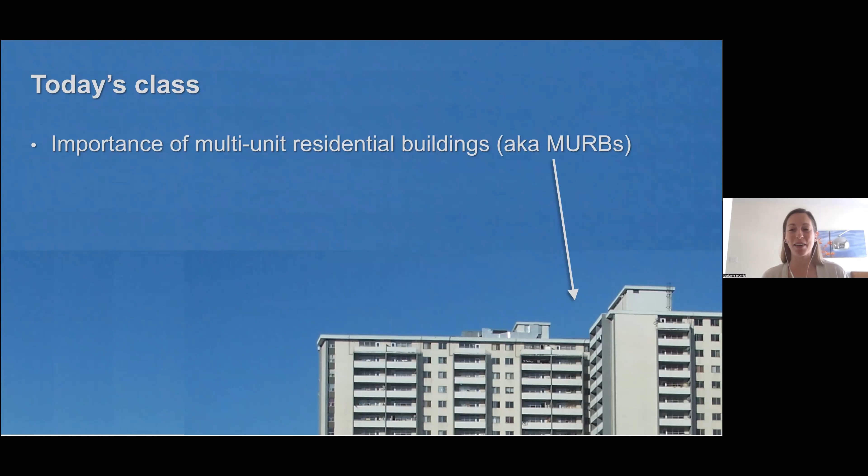So today I'm going to talk to you a little bit about my research and my area of interest in high-rise housing. This is something I've spent the last decade or more researching, and I'd love to share some thoughts with you today. So in our class today, we're going to start off by talking about the importance of multi-unit residential buildings, or MURBs, as we often call them in our group. Then we'll get into some of the common performance issues we see in MURBs, and introduce some of the challenges we'll see as our climate begins to change. Finally, we'll discuss some mitigation and adaptation opportunities in this building stock.

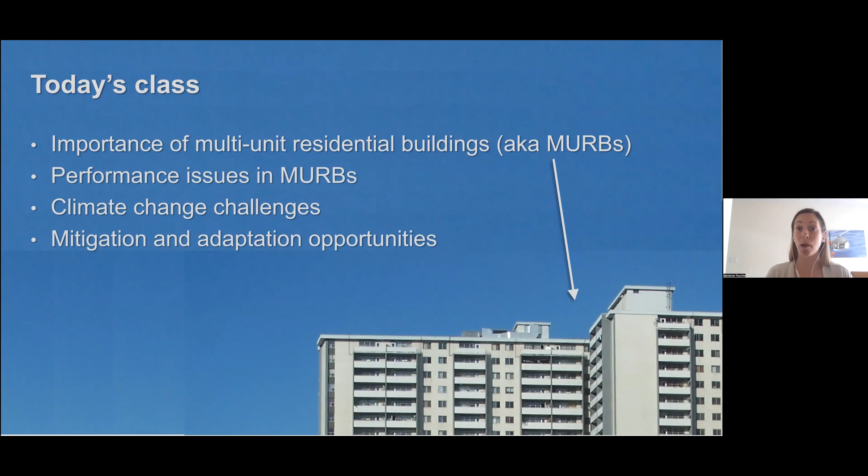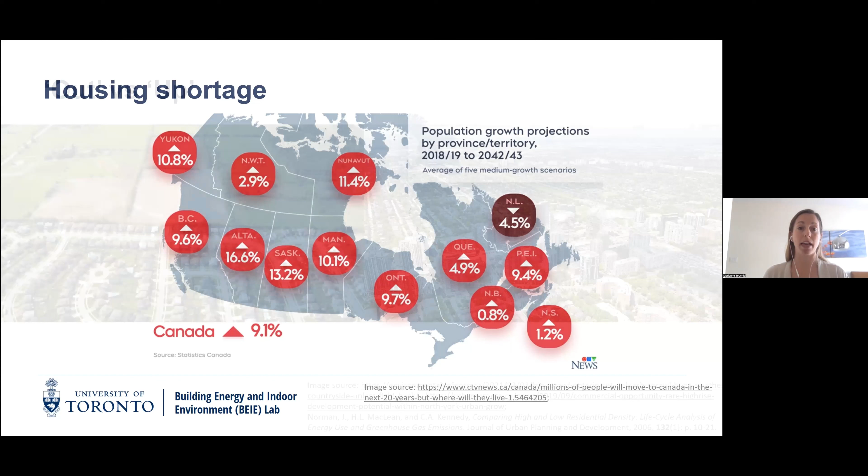Anyone who lives in the Toronto area is probably well aware of the news cycle talking about the housing crisis we're currently facing, even across the country more broadly. This pressure on our housing stock is only going to grow with our increasing population. We have a choice on how we meet this growing demand: the age-old question, do we go out into the suburbs, or do we go up and intensify our housing stock?

This decision, while the basis of this presentation is really going to focus on building level performance, I wanted to introduce the idea that how we pursue meeting our housing needs in the future goes well beyond the building level and has implications across the broader building stock. It's important to recognize that if these buildings are appropriately designed and operated, and I use that caveat which I'll explain more later,

MURBs can really be an inherently more sustainable form of housing, simply due to their material and space efficiency and the fact that they have less exposed surface area per dwelling unit. They also support more active and public transportation and keep the costs of urban infrastructure at a per capita level lower than what we'd see with a more sprawling development like you see here on the left. In the middle, I've got a snapshot from a paper written by some colleagues of mine a number of years ago, but I find this quite striking when you look at the GHG emission impact per person, not just associated with building operation, but that broader impact of materials, which we'll touch on, and the transportation implications of this building type.

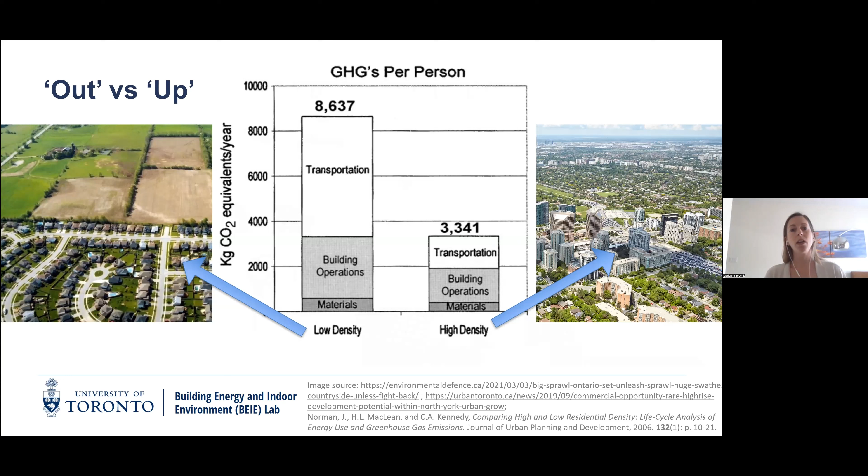So I just want to keep that in the back of our mind. In meeting the needs of our growing housing need, the big question is really whether MURBs are going to be the solution for us.

I have these two images up on the screen because they're predominantly two archetypes we tend to see in Canada. The post-war set on the left is from the 1960s, 70s, and we're currently in the middle of a second housing boom, which seems to have no end in sight. So we're going to address these buildings separately. While they do have a lot of shared features, they also have some unique features, so we'll talk about those.

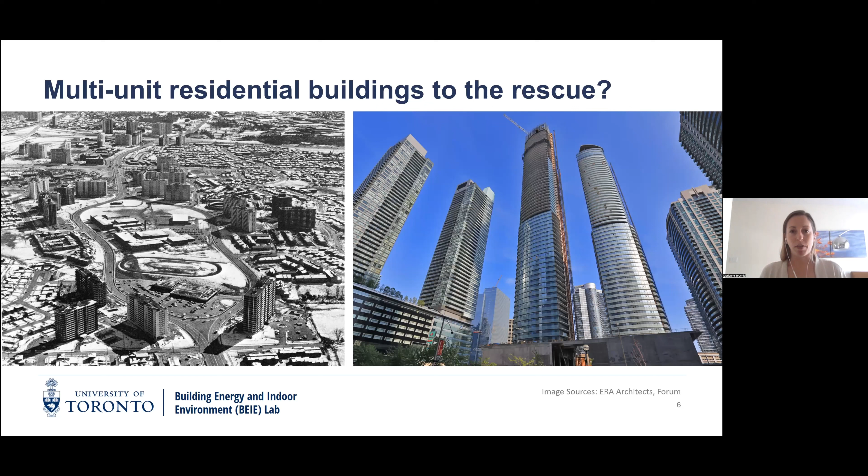But I think the big challenge we face, and that we need to keep in the back of our mind through this whole discussion, is that the vast majority of people still prefer detached homes. We'll go into some of the reasons for this. But in order to really drive this more dense housing, which we know has huge impacts in terms of our GHG emissions, both with respect to building operation, embodied emissions, and transportation related emissions,

we need to make this source of housing more attractive. So really the goal of my whole research program is to not only reduce energy use, but at the same time to really improve the quality of the indoor environment for residents so that this becomes a more attractive place to move to, this type of building form.

So let's start by looking at a couple of common challenges we see across this building sector, and then we'll layer in some of the climate change related challenges. Despite what I just mentioned about these buildings having the potential to be more material and space efficient, we tend to see incredibly high energy use intensities in these buildings, sometimes higher than single family building types. This is a concern which we'll address, and I'll explain some of the root causes.

In addition to that significant energy impact, we also see a lot of discomfort issues, which obviously make this potentially not an attractive source of housing - thermal discomfort, olfactory discomfort, acoustic discomfort. We also need to consider some of the challenges related to high-rise living in the event of a power outage - lack of mobility, elevators not working, water distribution, things like that. We'll talk about those as well.

If we look at some of the specific features of post-war buildings and our newer contemporary buildings, post-war buildings tend not to have central cooling, which is going to become a critical issue as we start to see our climate changing and growing warmer.

We're already at this point in time seeing dangerous summertime overheating, so that's something that we need to address. And then on the contemporary building side, where we've got these highly glazed buildings, we tend to see visual comfort issues, lack of visual privacy and glare, also thermal comfort issues related to those highly glazed enclosures. So certainly something that we need to consider.

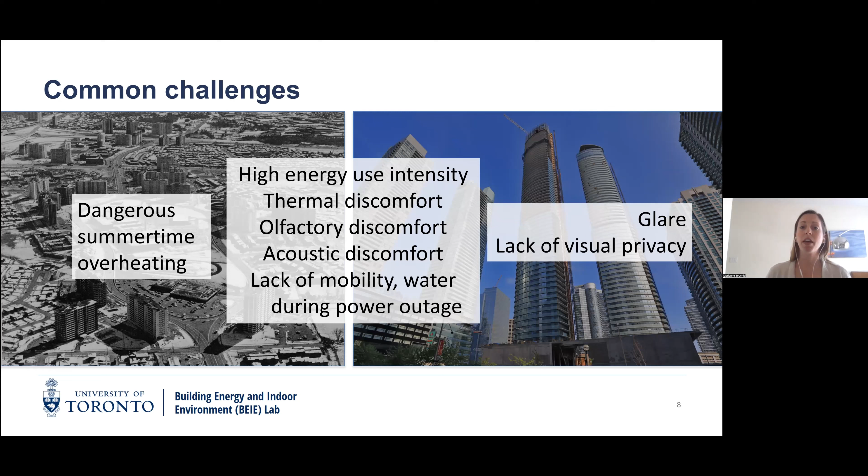So what I want to do is delve a little bit deeper into these two archetypes. We've done some extensive field evaluations of occupied buildings. While we do some work in the lab in my group, really the city is my living lab. So a lot of the work that we do is in occupied buildings, which makes our research I think really exciting, also somewhat challenging sometimes. So I want to share with you 2 or 3 studies that we've done, 2 field studies and 1 survey-based study, just to paint a picture of what's going on in these buildings.

So one was a study that we undertook. I actually started this when I was wearing a different hat working for the Atmospheric Fund, and was thankfully able to rejoin the study, where we looked at 7 post-war apartment buildings. And we used a combination of resident surveys so we could understand building occupant perceptions and behaviors, as well as monitoring of what are the temperatures that we're seeing in the suites, as an example.

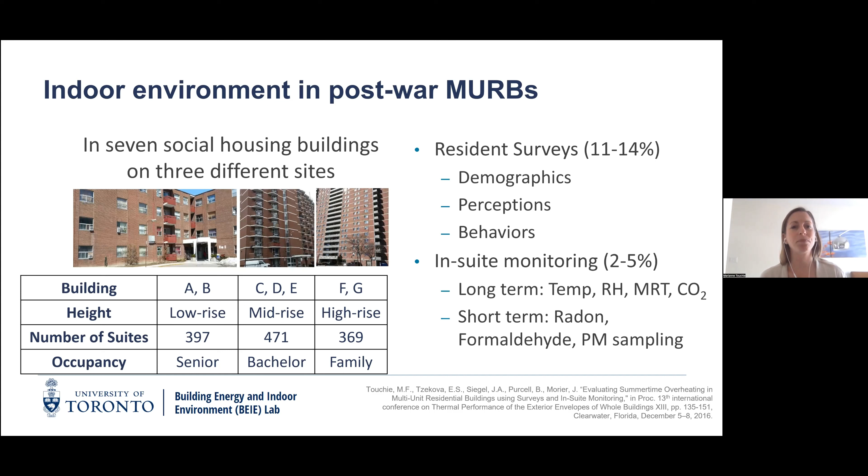So first, if we look at what the residents told us, there's a lot going on here, but I want to separate on the... oh sorry, let me just turn on my little pointer here. Bear with me one moment.

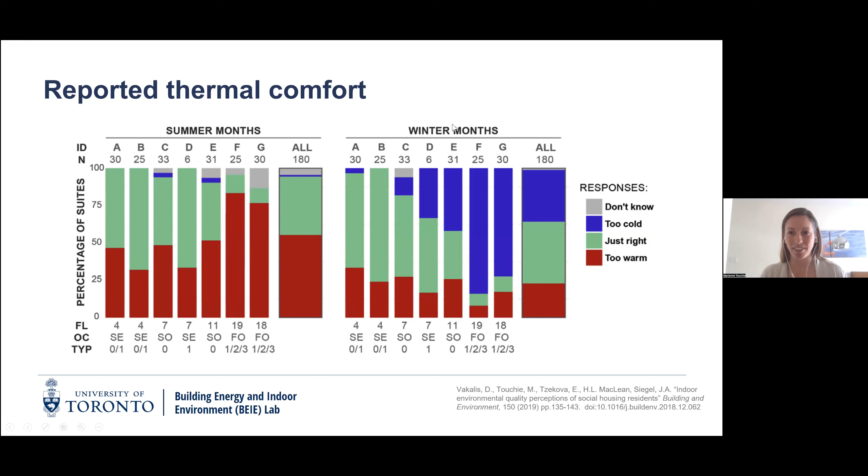This is data from 7 years ago, so we're already seeing warmer summers, which are only going to get more severe as we move forward.

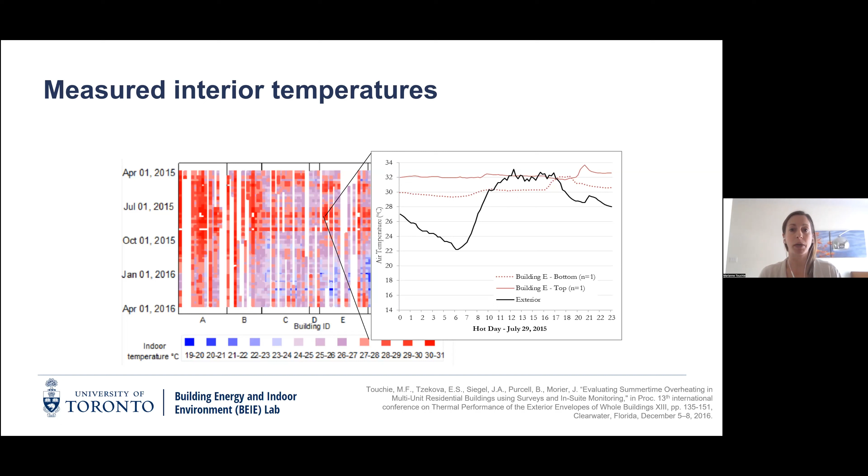Shifting gears a little bit to olfactory discomfort: one of the other questions we asked the residents was about odors that they detect in their suite. And again, we can see that the majority of residents are experiencing olfactory discomfort at least every day. What this is sort of a proxy for is that we have a lot of uncontrolled air movement, so air is not going where it's supposed to, and we're going to come back to that because that's a really key part of the puzzle when we're talking about MURB building performance.

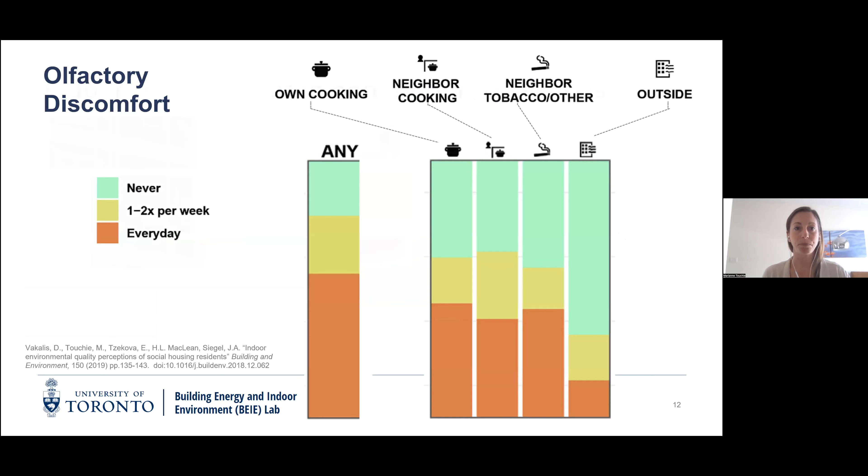So to shift gears from post-war to contemporary MURBs, we conducted a very similar study, again including surveys and in-suite monitoring, to figure out what was going on in these newer buildings as well.

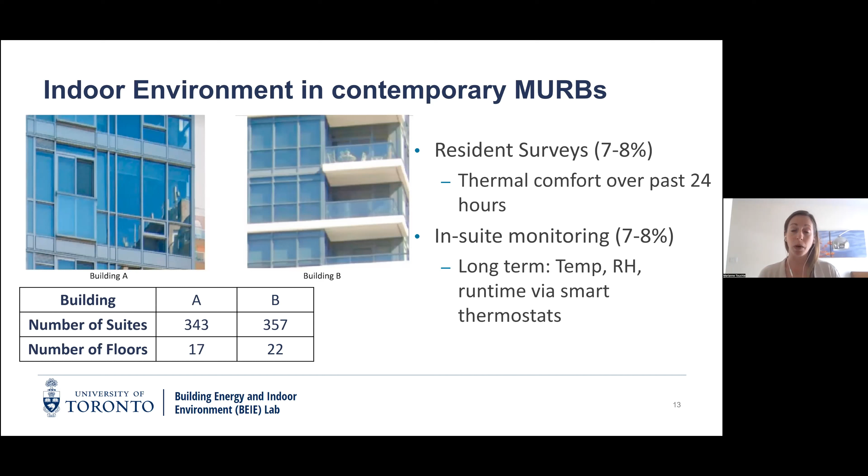So my question for you: are new buildings any better? What do you think? I'm sorry to say, not really.

We found that in reported discomfort, about half of residents were still uncomfortable in winter and summer, even in a scenario where residents have control over their heating and cooling at the suite level. This was concerning. We're also seeing over-conditioning of suites, another clue that air isn't going where it's supposed to, signaling wasted energy. Many residents reported propping open their windows and doors, which again signals things aren't working the way they should.

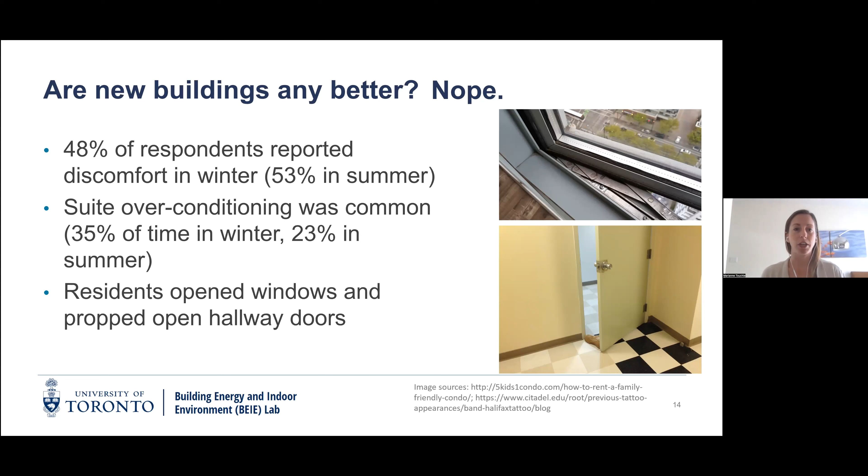In addition to the field studies on post-war and newer buildings, we've also conducted work on understanding acoustic comfort in MURBs. MURBs are unique - unlike a single family home, where unless you're attached in row housing you don't hear your neighbors, in MURBs you're living above, below, and beside other units. So acoustic comfort becomes a big concern in buildings with shared walls and shared spaces.

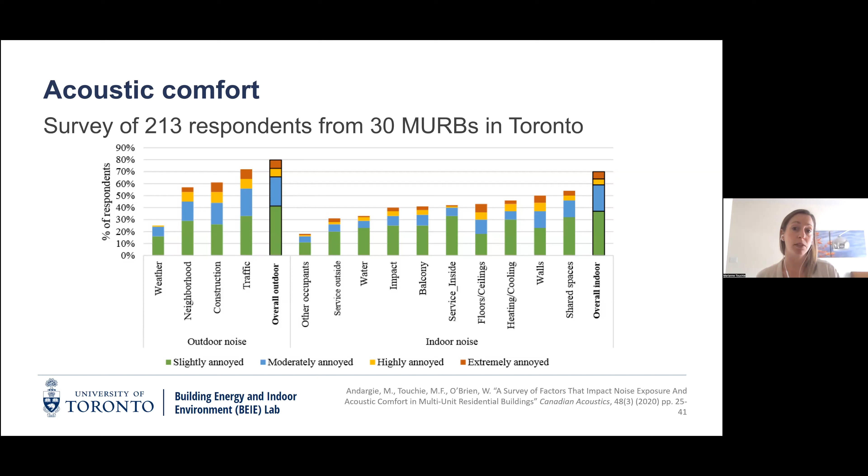We conducted an internet-based survey of over 200 respondents, and we were concerned to see that the vast majority of MURB residents reported acoustic discomfort, related to both outdoor and indoor noise sources. These acoustic discomfort issues have direct impacts on sleep, mental stress, mood, and ability to study and work.

I'll flag that this has become a lot more important - you can see I'm doing this from my home right now. A lot of us are working and spending more time at home, and for people doing that in the MURB context, we have to think about what implications acoustic discomfort has on their ability to work.

As a result of these effects, this annoyance and disturbance, people take things into their own hands and try to improve acoustic comfort in their suites. They undertake interesting activities, one of which is playing music or TV even more loudly than the noise they're hearing to mask it - which only creates even more acoustic discomfort in these shared spaces.

But there are also interdomain implications. One thing people tend to do is weather strip their suite doors. Now in a lot of buildings, that's where your ventilation air is coming from - it's coming from the corridor. So a measure taken to mitigate acoustic discomfort can actually have a negative impact on indoor air quality, by limiting the supply of ventilation air.

This is my first hint at what we need to be doing when thinking about improving the performance of these buildings. We know we need to address energy, and we need to address occupant comfort and satisfaction. But we also need to recognize that all of these systems are interconnected - something you do to address thermal comfort, like window operation, might impact acoustic discomfort, or something to mitigate acoustic discomfort might impact indoor air quality. We need to keep in mind all these systemic interactions.

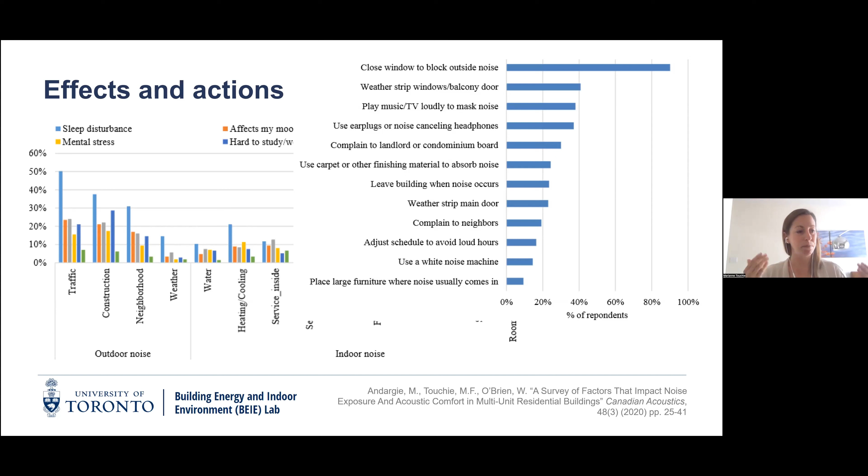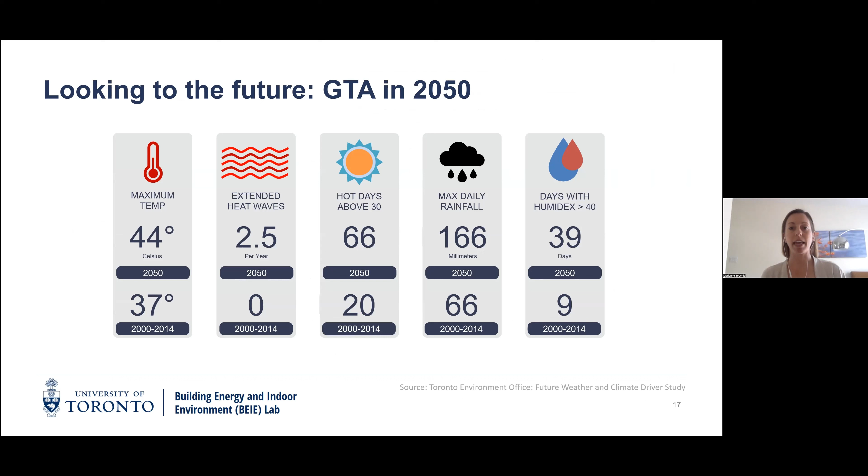So now that I've painted this rosy picture of MURB living - I promise it will get better - let's layer in what's happening in the future. I'm sure everyone on the call is aware of what we're facing as we move forward, and Canada in particular is slated to be exposed to some fairly significant changes in the coming years. This has become all the more real given what happened out west last summer with the heat dome, which is now becoming a serious public health issue we need to consider.

As I mentioned, many post-war buildings don't have any sort of central cooling, and out west it became quite clear that air conditioning is not common in BC. When we see what happened last summer, this is something we need to consider, as well as integrating active cooling.

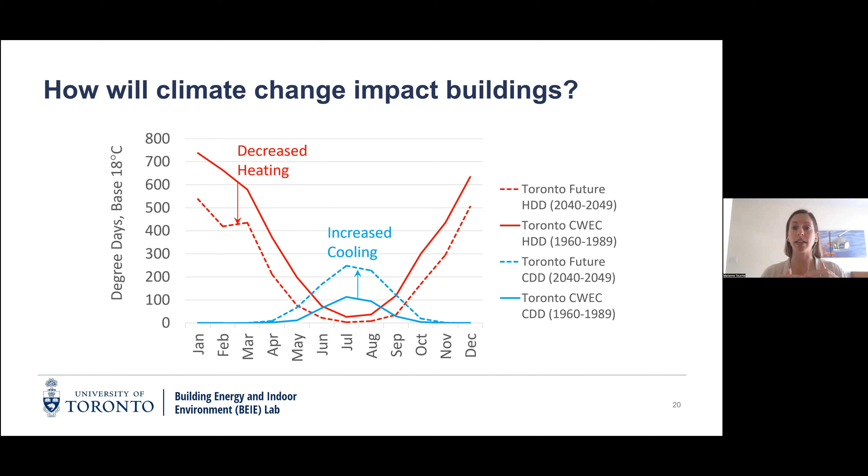As we face a warming climate, we're going to see decreased heating, which will have a positive impact on our natural gas associated GHG emissions, but we're going to see a dramatic increase in cooling requirements as well. So it's important to consider this energy intensity implication.

I've got a model we were playing around with, a multifamily building where we were modeling with CWEC, which refers to the Canadian Weather Year for Energy Calculations. It's a standard weather file that a lot of building designers would use to model building performance. We compared that to a future weather file from the 2040s to understand, if we're designing a building using today's weather, how ill-prepared we'll be for our projected future weather.

You can see there's a huge increase in the space cooling energy intensity, which we need to plan for in terms of our electricity supplies and ability to meet peak loads during extreme heat events.

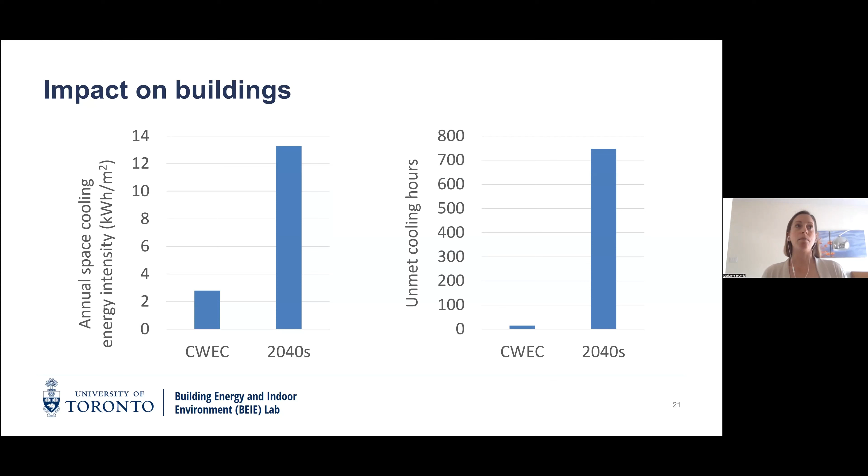We also see on the right-hand side a plot of what we call unmet cooling hours. Normally you would design a system so that there would only be a small fraction of the year when that heating or cooling system could not keep up with the demand. But based on current cooling capacities under these future weather conditions, we'd see a huge increase in unmet cooling hours, which is a huge concern.

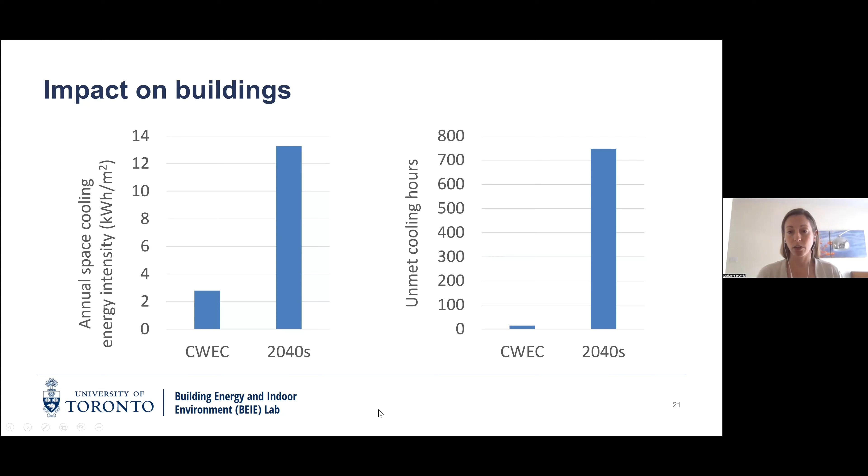We also have other elements to factor in, like increased rainfall events leading to flooding in buildings. While that's certainly an acute problem, we also need to keep in mind the chronic impacts of wet building materials, which if not replaced and repaired properly, can lead to long-term indoor air quality issues.

We're also seeing more and more forest fire events, which again leads to concern. Normally we assume our outdoor air is cleaner than our indoor air, so we can bring that in for ventilation, but what happens when you can't breathe the outdoor air? We need to consider how our buildings are going to continue to operate under conditions like that.

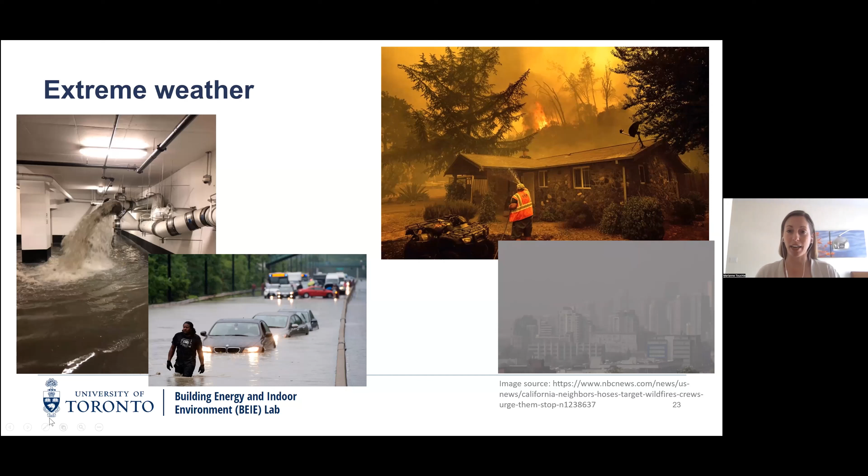As I alluded to before, high-rise living without power can be rather challenging in terms of mobility, access to water, heating and cooling. These power outages are often aligned with extreme heat or cold events, so we need to consider that and the loss of our mechanical ventilation as well.

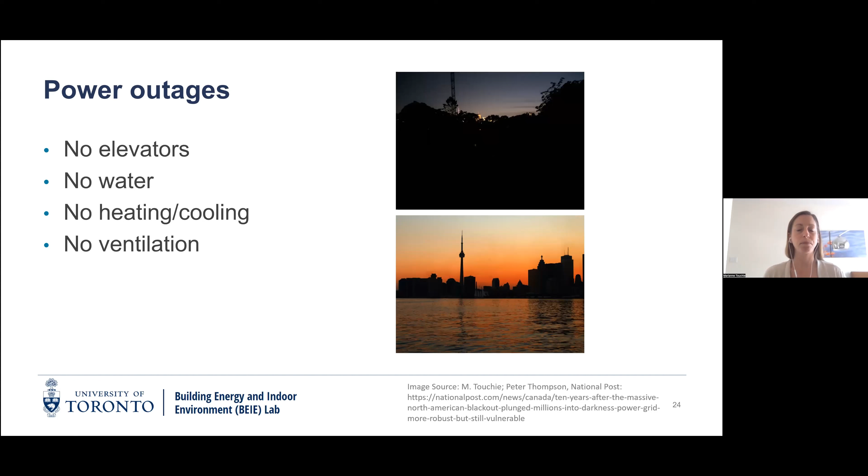Now that we have a clear picture of the challenges MURBs face, and we've layered in what we can expect in the coming decades, let's shift our attention to what we can actually do about it. Many on the call are familiar with these terms, mitigation and adaptation, but I want to point out how they are related in building design and operation before we break these down.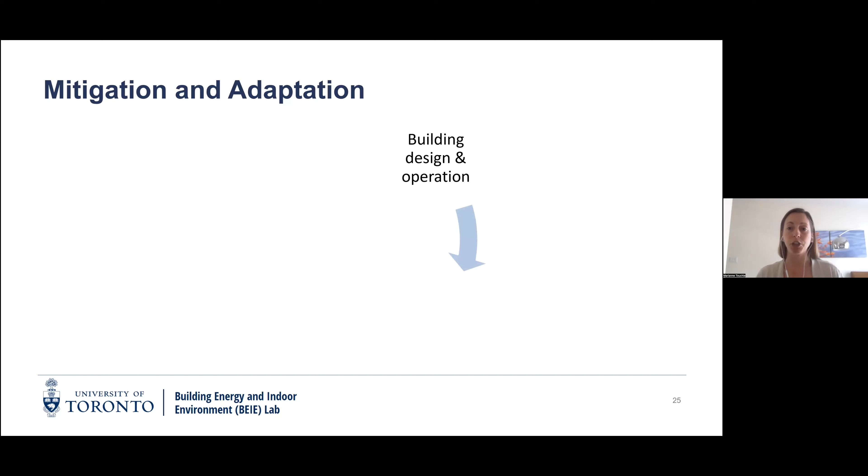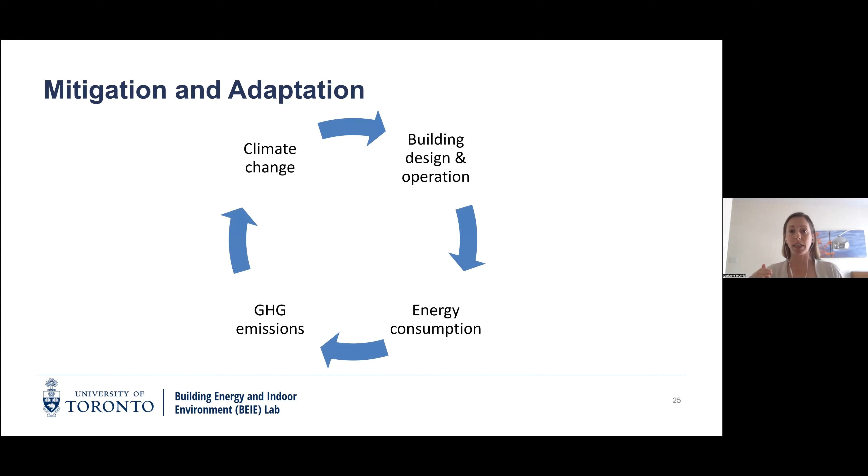Building design and operation has a huge impact on energy consumption, which directly impacts our GHG emissions. Our GHG emissions are what's driving climate change, and climate change then impacts our building design. So in thinking about how we need to retrofit these buildings, we need to consider both mitigation and adaptation lenses: mitigation to reduce GHG emissions, and adaptation, how we change how buildings are operated to ensure a safe, comfortable, and healthy environment in a changing climate.

Looking at the mitigation side, we want to reduce our energy demand, and for whatever demand remains, ensure we're electrifying and decarbonizing where that demand is coming from. On the adaptation side, recognizing we're going to see increasing frequency and severity of extreme heat events, we need to increase our cooling capacity, ensure sufficient backup power for life safety reasons, and ensure a robust ventilation strategy that can work no matter what is happening outside.

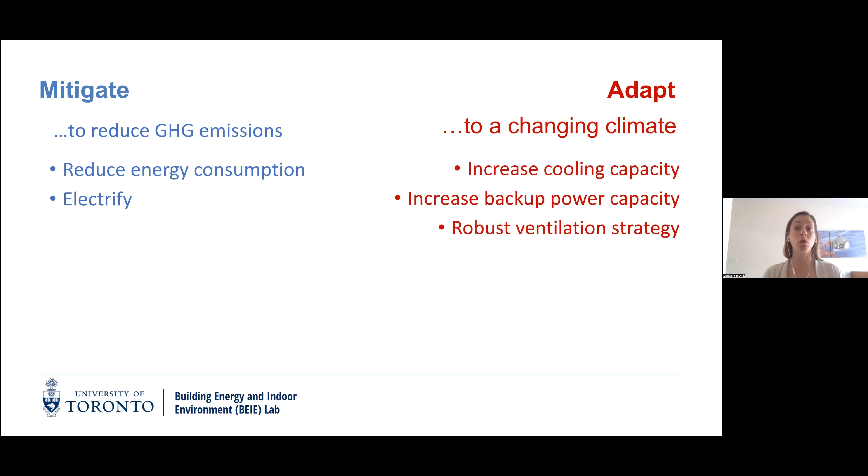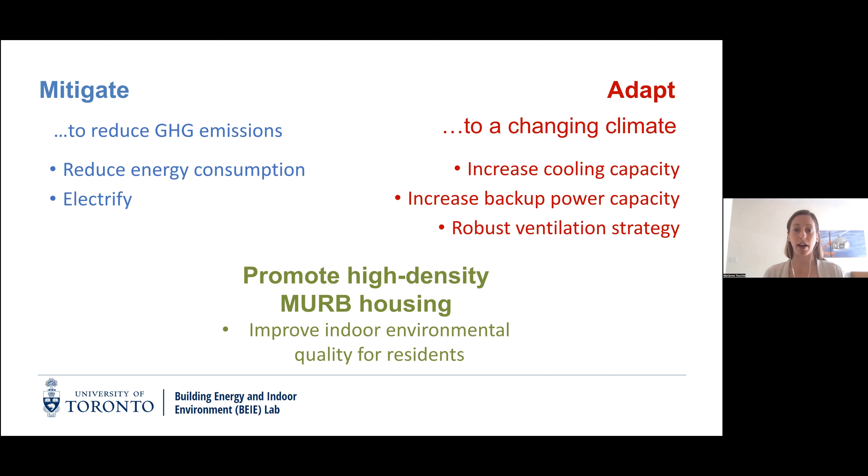In the context of mitigation and adaptation, remember the concept we talked about at the very beginning. When we look at the broader impacts of GHG emissions related to housing, we also need to ensure that at the same time as meeting our mitigation and adaptation goals, we're working to promote higher quality, high density housing, which has good indoor environmental quality and design features that make residents want to choose this type of housing over single family housing.

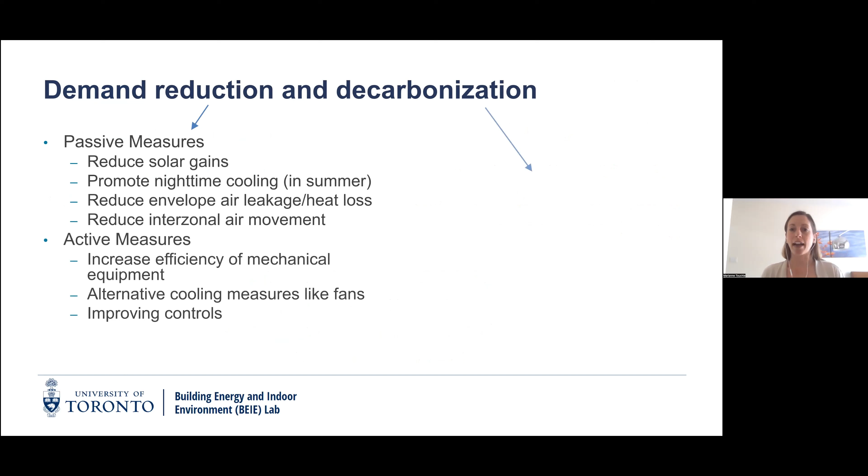So if we start by looking at some demand reduction and decarbonization, what we're going to do is step through a couple of examples of passive measures, active measures, and then we'll flip over and look at how we actually meet some of those demands in a decarbonized fashion, or at least reduced carbon, depending on what province you're in and your grid mix.

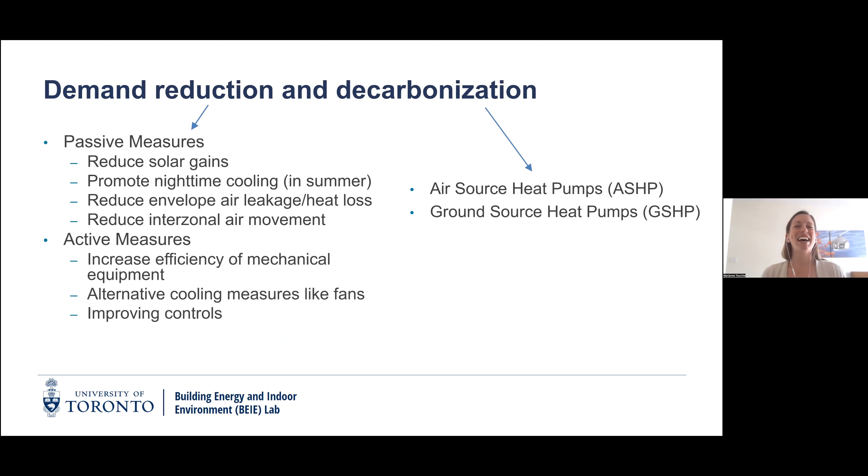So we'll step through each of these. What I want to try to do is highlight, these are all obviously going to have an impact on energy performance and subsequent GHG emissions, but I also want to flag the potential IEQ implications, because if we're trying to improve the quality of the indoor environment, we need to make sure that we're improving that for residents.

So in terms of reducing solar heat gain, lots of different strategies that we can use here. Upgrading windows with different films, using shades and blinds and things like that. Although one of the most effective, which we don't see very much yet in Canada, is exterior shading. So either fixed shading, as you see here on the right, or operable exterior shading, which you see here on the left.

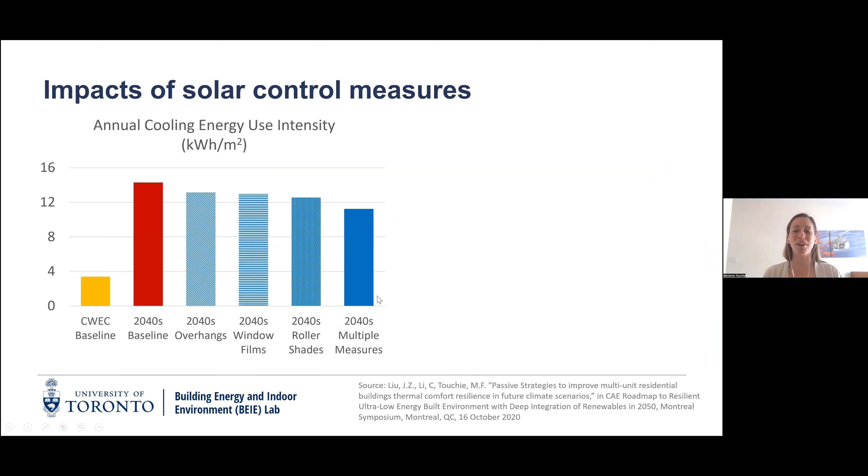And again, we play around with models a little bit sometimes. So we were looking at the impact of these solar control measures - overhangs, window films, roller shades - and what impact that could have on cooling energy use intensity. You can see that while it's certainly reducing that cooling energy use intensity, we're still going to need to deal with some additional measures to really bring that down.

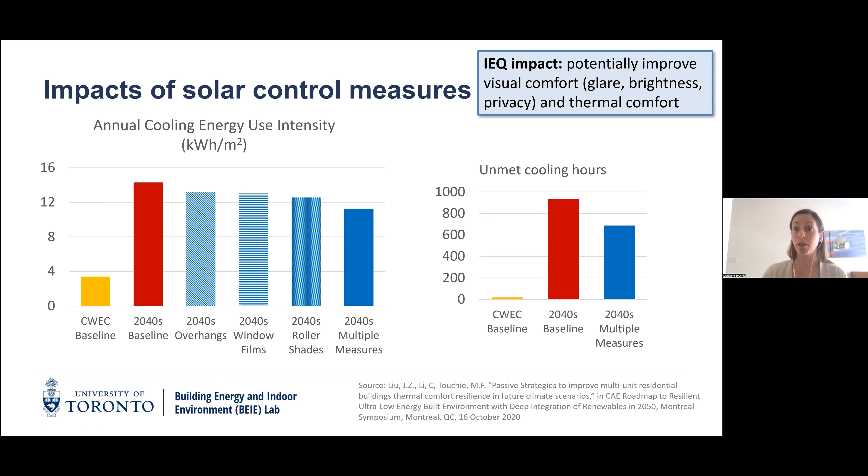But it does have a significant impact on those unmet cooling hours as well, and has the added benefit of potentially improving visual comfort, reducing glare, brightness, increasing visual privacy. And if we can keep that solar gain down, we can also have the added benefit of potentially improving thermal comfort.

And I mentioned when we were looking at the post-war buildings before, we have these natural diurnal temperature swings from day to night. So we want to try to take advantage of cooler nighttime temperatures to bring temperatures inside the building down to relieve the pressure on our mechanical cooling.

So there are certainly options to promote natural ventilation in MURBs. And this has the potential to improve thermal comfort overnight, particularly in buildings that don't have mechanical cooling, and can aid in ventilation as well, depending on the conditions of the outside air.

Although it can potentially have a negative impact on acoustic comfort, because as you imagine, if you open the window on a really busy street, that could certainly impact that overnight, especially.

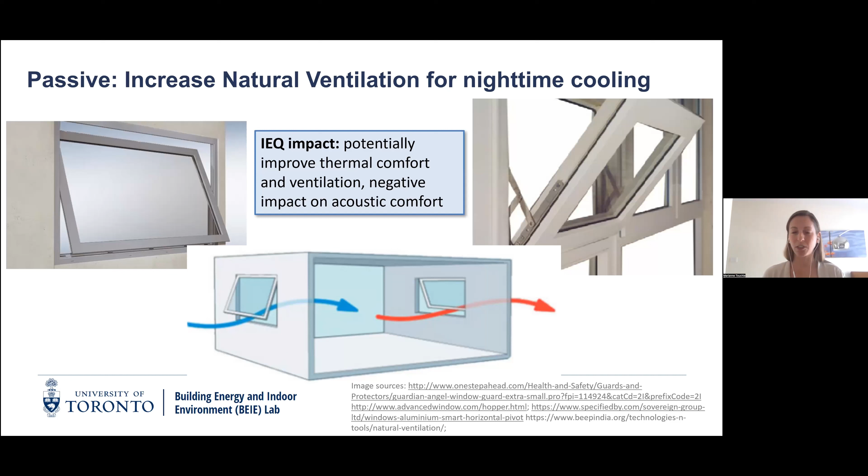So another passive strategy that we're starting to see a lot more of now is what we call overcladding, which is where we put more insulation on the outside of the building. And also, usually this includes replacing windows and improving the air tightness of the enclosure. Now, this is one instance.

There were a lot of questions, and I thank you for those before the presentation, about embodied energy, or embodied carbon. And while the focus of this talk is really on operational carbon and GHG emissions, this is the kind of retrofit where we need to really start thinking carefully about the implications that our material choices might have on embodied emissions. We'll touch on that more a little bit later.

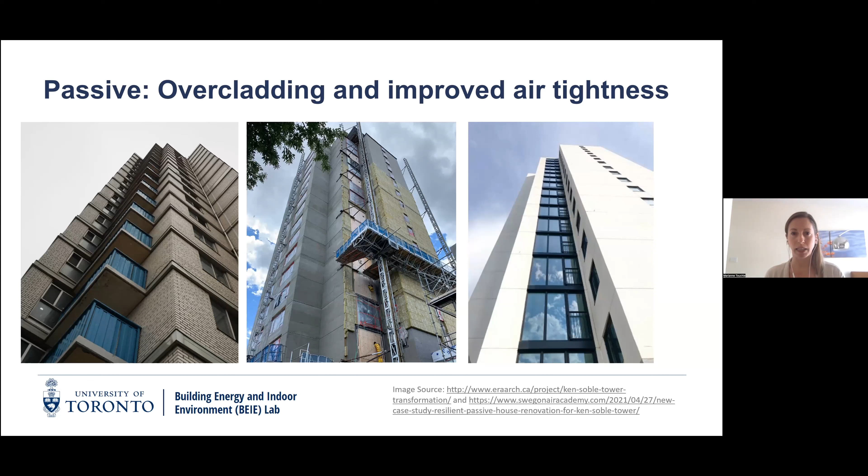But the impact of overcladding and improved air tightness can really have a dramatic impact on our energy use intensity. With a little asterisk, I'll just flag, this is a modeled energy use intensity improvement for this building. We're actually working with this building right now to try to verify the post-retrofit energy use. So stay tuned, I can come back to you and report whether this was actually achieved.

But I just want to flag this idea of a building as a system again. So imagine you've spent all this money, millions and millions of dollars, overcladding your building, replacing your windows, really tightening up the envelope. You passed your blower door test, you're all set. But if you haven't done anything about the in-suite heating and or cooling control, and you haven't done anything about the ventilation and providing a reliable supply of ventilation air to your suite, remember that occupants are going to take matters into their own hands.

We might see things like auxiliary heating and cooling equipment, or people opening their windows in the middle of winter trying to get more fresh outdoor air. When you're considering a retrofit like this, it's really important to consider the broader building systems and components and how they'll work together, because you wouldn't want to spend all this money and then have the energy savings go out the window, pun intended, when occupants take matters into their own hands.

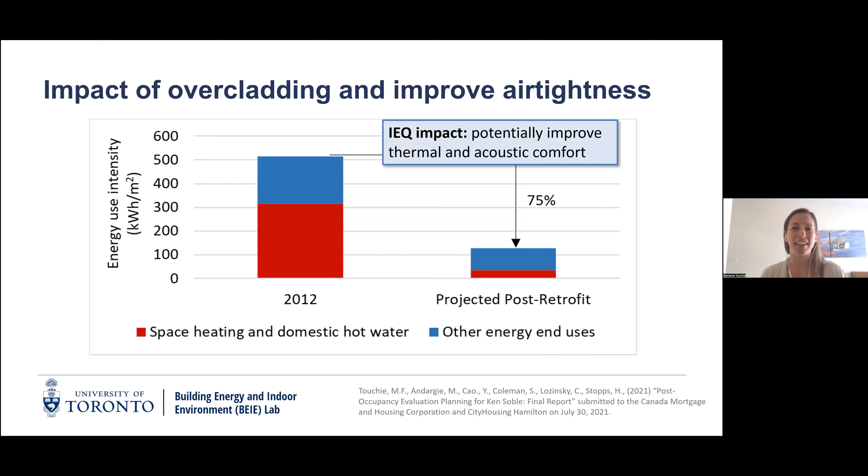Now we're going to come back to my favorite topic. We spend a lot of time talking about something invisible, which is interzonal air leakage. If you think back to the olfactory discomfort I mentioned a couple slides ago, all those odors coming from other suites are a sign that air is not going where it's supposed to. So exhaust isn't working as it should, and pressurized corridor ventilation systems aren't keeping those odors within suites.

As we improve the energy performance of our buildings, we've been really focused on enclosure air tightness—meaning windows and walls. But what I'm really advocating for is more attention being paid to interzonal air leakage.

This is one of my PhD students' work, which I'll explain. Normally with interzonal air leakage, we test a single suite in what's called a compartmentalization test. You're basically trying to make sure the suite enclosure as a whole—the floor, ceiling, walls, and exterior wall—is relatively tight. We do that by testing a single zone, and it's actually relatively easy to pass that test.

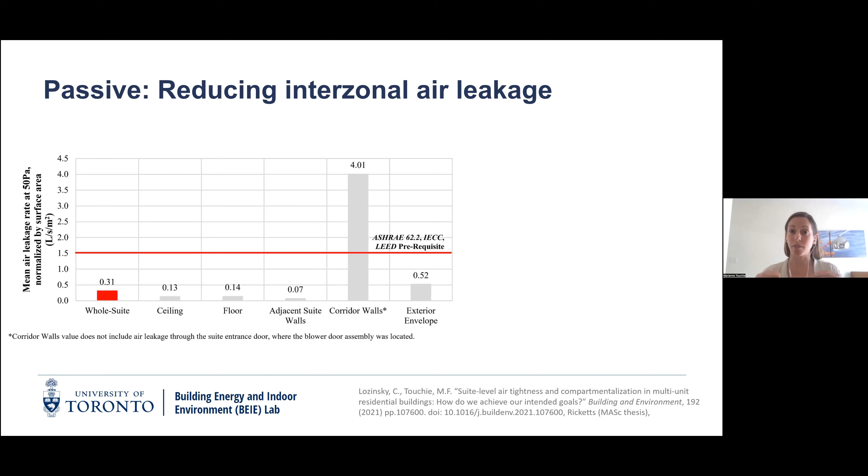But what my PhD student was working on is actually looking at each of the six sides of the suite separately, and noted that the air tightness of those boundaries is very different. This can have a huge impact. You can see, if we have the requirements here in the red line, that the corridor walls—not including the doors—vastly exceed those requirements. If anyone's interested, I can talk offline about why this is, but that's certainly contributing to uncontrolled air leakage.

This makes sense. You've got ventilation air being pushed down into the building by a fan, and you're fighting against what we call stack effect—that rising warm air in the building. So you've got these pressures fighting against one another. Getting air where it needs to go in a tall building is a very challenging prospect. We're kind of seeing hints at this through this data.

So we've been playing around with some models—this is not yet peer reviewed, something hot off the presses just for you today. Rather than focusing on enclosure air tightness, which is very important from an energy perspective, we also need to be focusing on the interior partitions. We were playing around with the air tightness of different partition types and found that simply by paying attention to the stairwell doors, and really the elevator doors are the big one, we can dramatically reduce interzonal air leakage, and as a proxy, our thermal energy demand.

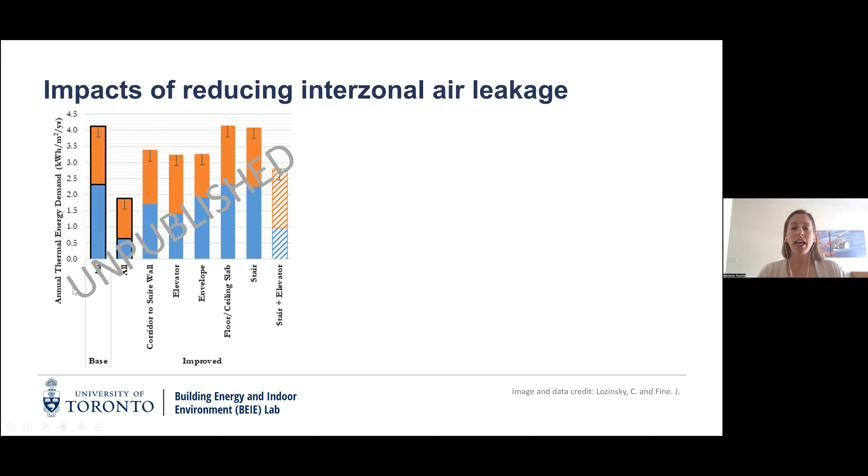Just what I mean by this—I'm sure you've seen this in office towers—you'll often have a vestibule around the elevator shafts, and that's really to break up this large vertical shaft where air easily moves back and forth through the elevator shaft. If we can get that under control, then we can do a much better job of getting air where it needs to go.

I can't talk enough about interzonal air leakage. In addition to the energy benefit, it also has the potential to really impact other performance issues we're seeing in MURBs. Olfactory discomfort can be addressed, and acoustic discomfort too, since wherever air goes, sound also goes. If we can better control that, we can improve acoustic comfort and thermal comfort as well. This is something we really need to be paying attention to.

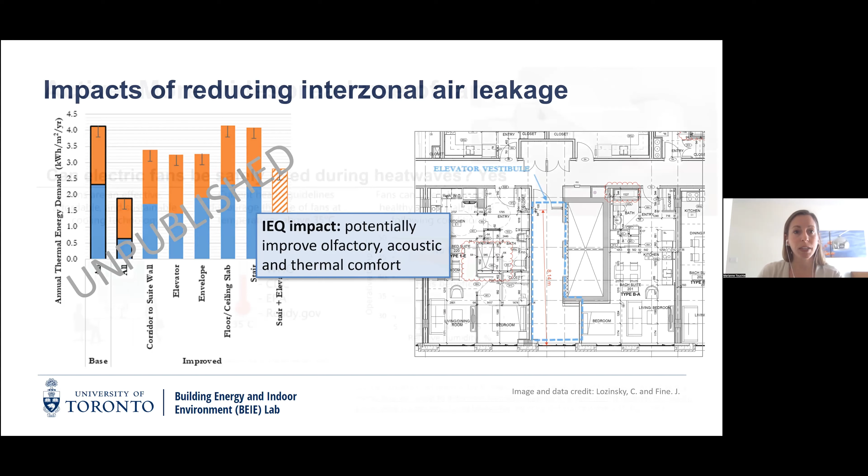Shifting from passive options to more active systems, our modeling has shown that even if we do everything right from a passive perspective, in our changing climate we're still going to need active strategies to maintain thermal comfort in these buildings. There's recent work out of UC Berkeley looking at the use of fans and how far we can get with fans in terms of improving thermal comfort during heat waves. This isn't common in multifamily buildings or MURBs, but could be used more widely, especially with the appropriate floor to ceiling height, which isn't always the case. That has huge potential to improve thermal comfort.

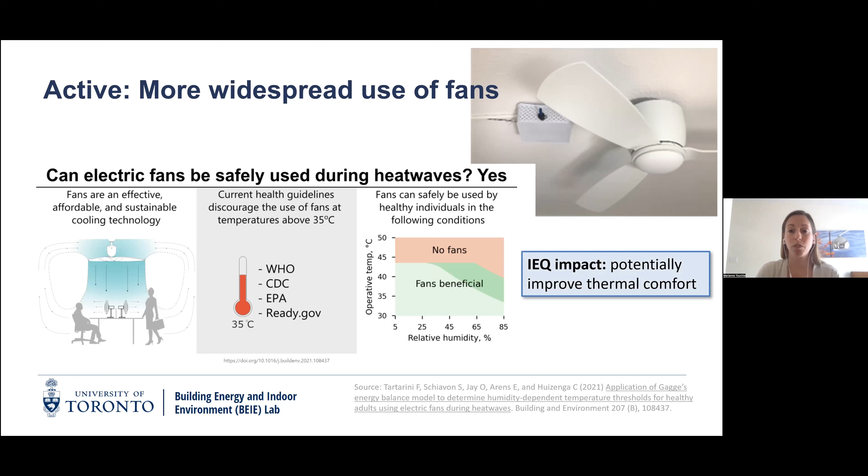Going back to our post-war building friends, recognizing we don't always have the luxury of in-suite controls like in newer buildings, and installing this on a per-suite level is incredibly expensive, we've been exploring ways to strategically place fewer control valves throughout the suite and use wireless temperature sensors or a smartphone app to control groups of suites experiencing similar temperature conditions.

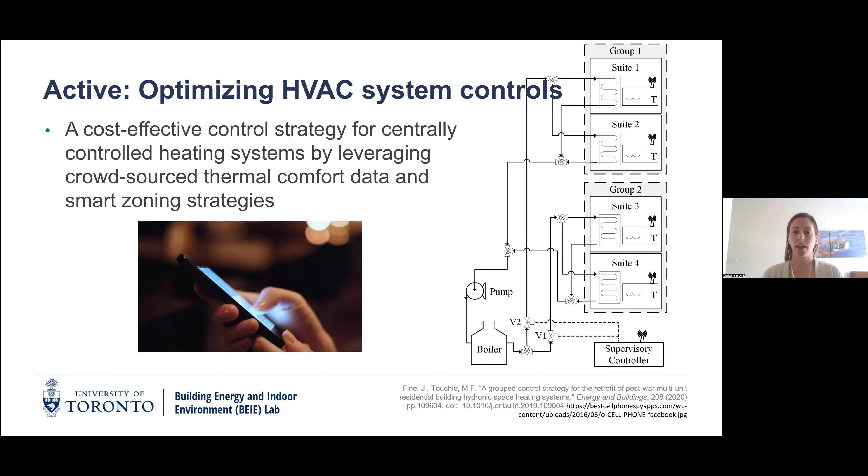We did some modeling with this, and while there's quite a range in payback period, we tried lots of different strategies for placing these valves. There's potential, accompanying our green options which are probably most palatable to building owners, somewhere in the 10-year payback range. We can still see a fairly significant energy reduction, around 10 to 20%, but a huge improvement in overheating, really reducing instances of wintertime overheating by properly controlling these grouped suite arrangements. This is something we've been working on as well.

That has the potential to significantly improve thermal comfort, but also adds the ability for occupants to control their spaces, which means ideally they'll use less auxiliary heating or other equipment within their suite.

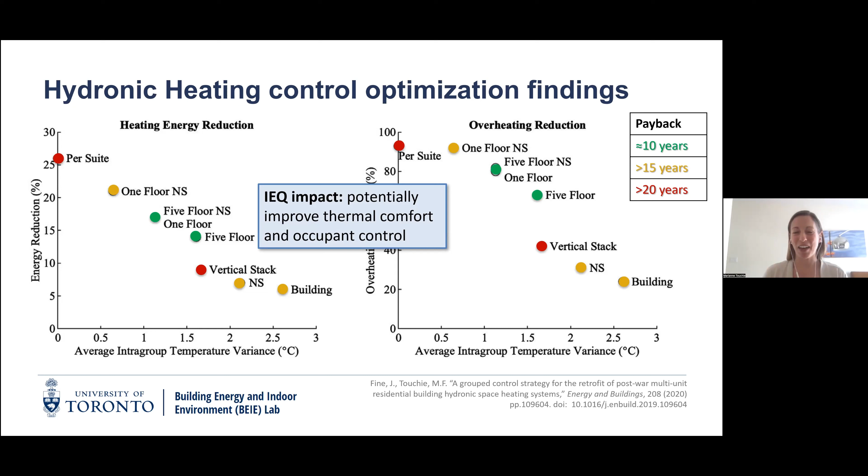For buildings that do have in-suite controls, some of you may be shocked to find out that a lot of new MURBs have non-programmable thermostats in them. So one relatively quick and easy off-the-shelf solution is to employ smart thermostat technology. I'm not promoting the one on the upper right here, it's just an example of what one looks like. But one of the big benefits of smart thermostats is that a lot of them have an occupancy sensor in them.

Even though you may have programmed your thermostat to follow your comings and goings, the occupancy sensor can detect when you're not there, perhaps when you said you would be, and dial down that set point temperature to save energy. We undertook a study of this, hijacking people's thermostats - they let us come into their suites and replace their programmable thermostats with smart ones. We saw really high programming rates achieved, probably because the user interface is a lot easier to use. I don't know if anybody's ever tried those push button thermostats - incredibly difficult to program.

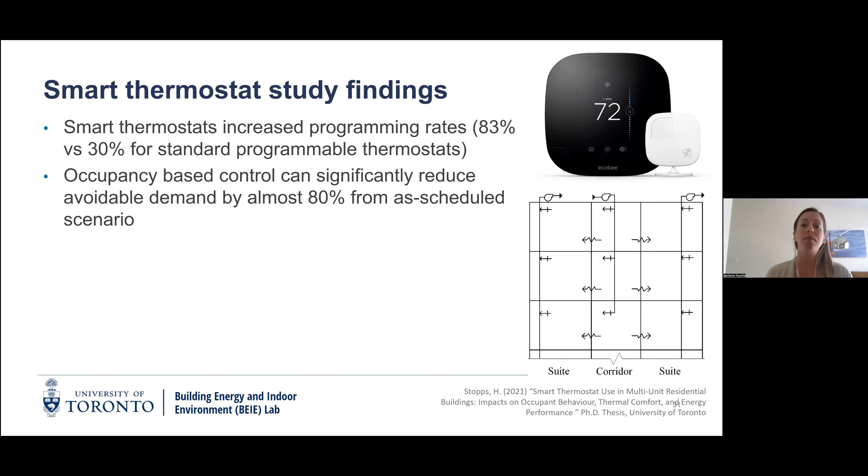One of the exciting things was that this occupancy-based control can really significantly reduce avoidable demand. What I mean is demand when you're not home is dictated by your program - can we avoid that from the as-scheduled scenario simply by introducing occupancy-based control?

One really interesting thing we found, which was unexpected, was that in a MURB context, unlike in a single family home, you can network these thermostats and actually use them to diagnose performance issues within the building. By analyzing the thermostat data in the two buildings where we did the study, we found that the central systems were actually over-conditioning, leading to a waste of heating and cooling energy, which was impacting the thermal conditions in the suite. So that was a win-win on the energy and thermal comfort side, addressing that single problem.

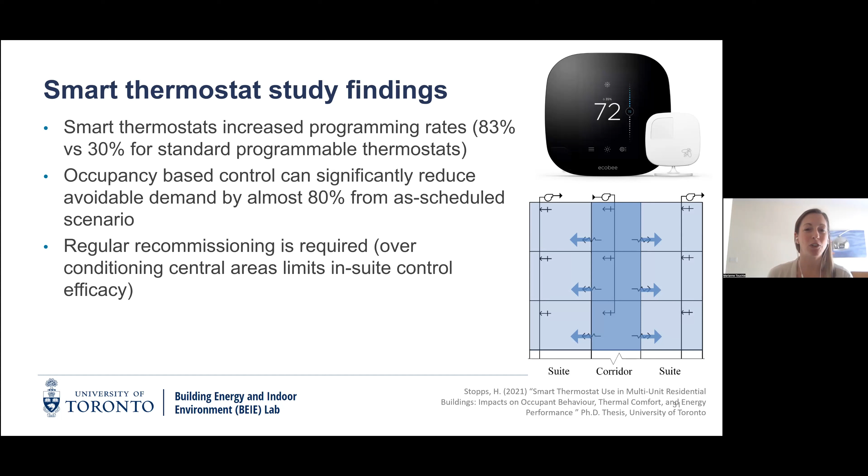And then again, the last active strategy I want to talk about is coming back to that idea of decarbonization. For those unfamiliar, out west you tend to use electric heating, but in the Toronto area and in Ontario more broadly, and across a lot of the country, we tend to use natural gas for space heating and domestic hot water heating. In residential buildings, space heating makes up about 50% of the energy we require, and an even larger proportion of the GHG emissions. So getting off that GHG-intensive fuel is a big move toward reducing building-level GHG emissions.

This is also hot off the presses. One of my undergraduate engineering science thesis students was exploring how we introduce active cooling into these post-war buildings. What we often see are units called PTACs, for those unfamiliar - those are just the little window units or floor units you put in each suite.

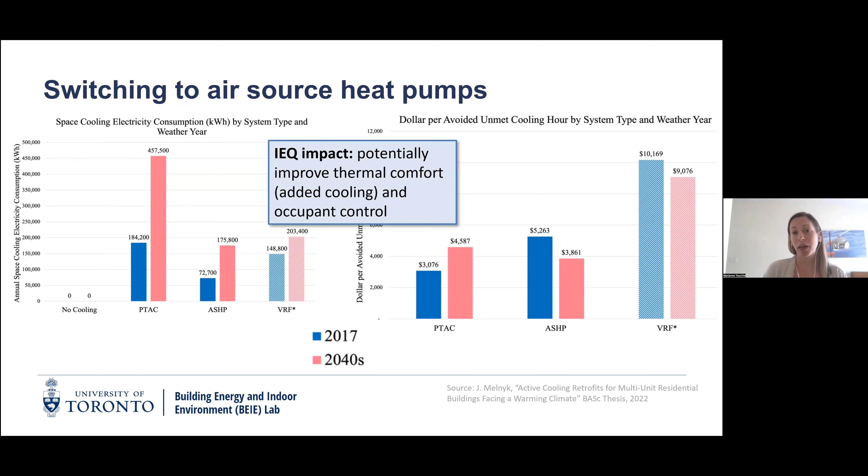But what would happen if we introduced an air source heat pump, and what would be the cost associated with that? We can see there's a significant reduction in the energy associated with providing space cooling, although it's a more expensive option at this moment in time. As we look to the future and the weather we're going to see with our changing climate, it actually becomes a more economical approach. This is really exciting, and I think we're going to see a big shift to air source heat pumps in the coming years, particularly in the retrofit context. These also have the nice benefit of not only switching our space heating fuel source from natural gas to electricity, but also providing added cooling where perhaps there wasn't that ability in the past.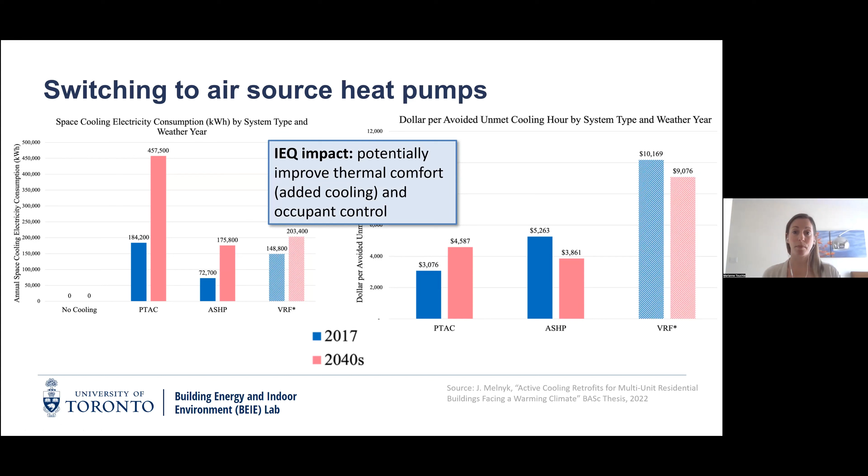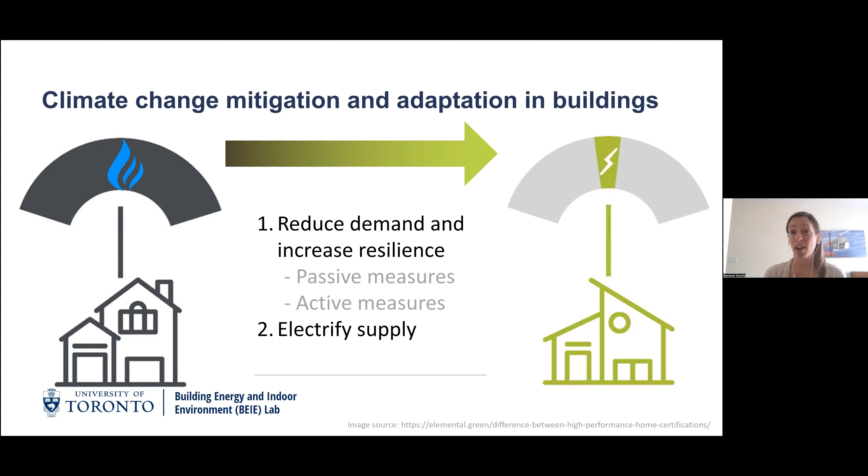So if we zoom out from some of these ideas, really we want to be addressing both mitigation and adaptation at the building level through two fairly simple steps - though there are a lot of little sub-steps in here. We of course want to reduce demand and at the same time increase resilience to some of those extreme weather events I mentioned at the beginning. And then, as much as possible, electrify our supply and get off our GHG-intensive fuel sources.

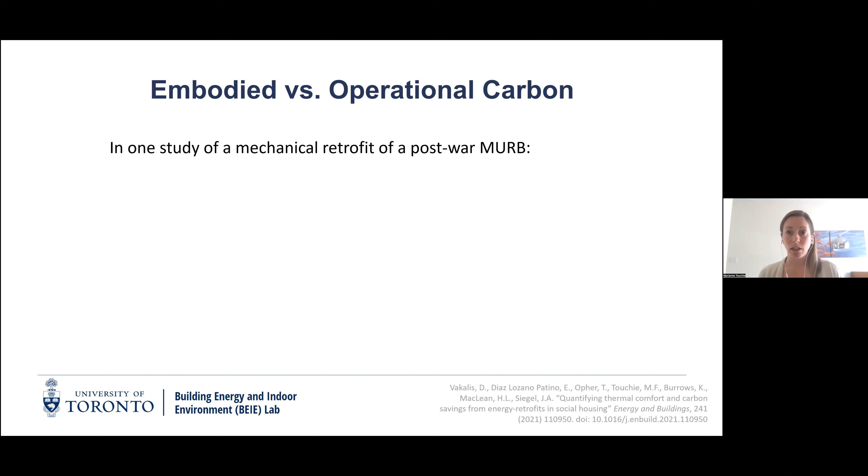So all of that discussion so far has really been about operational carbon. What I do want to flag here is that as we get more high-performance buildings with lower energy use, the embodied carbon piece of the pie becomes a larger part of the conversation. There has not been a lot of work done here in the retrofit space. One study we were involved in was purely a mechanical retrofit, and the embodied carbon to life cycle carbon savings really made it a no-brainer.

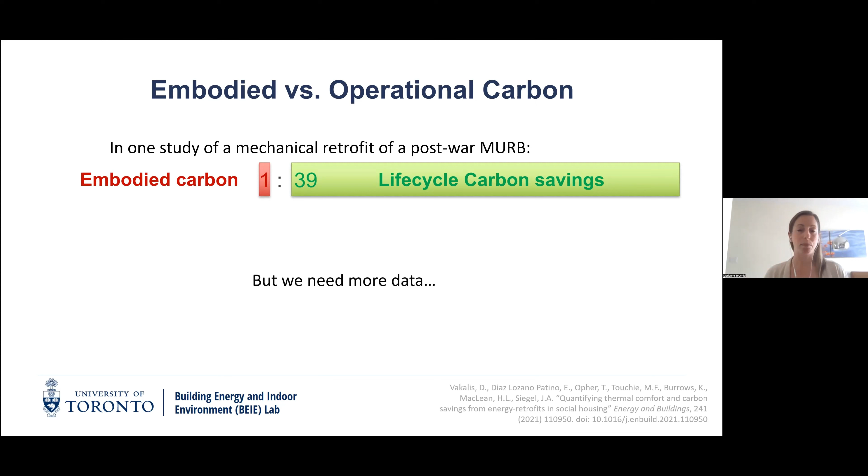But once we start to get into overcladding retrofits, which I flagged before, that's really where we need careful consideration of the materials we're introducing. We really need more data to inform what this looks like, and we're working with some partners on this - it's a direction we're going to spend a lot more time on in the coming years. What I was encouraged to see, just last week or the week before, was a report on new building embodied carbon tracking, done by Mantle, and I think the City of Toronto and TAF were involved. So this is the kind of data we need, but on the retrofit side of things, we're just starting.

This is how energy performance monitoring started 20 or 30 years ago - we had no idea what our buildings were using. Now a lot of people can probably cite the energy use intensity of their building, or at least I hope you all can on the call. The point is, we can't manage what we don't measure. So if we don't start collecting this embodied carbon data, we're never going to be able to manage it.

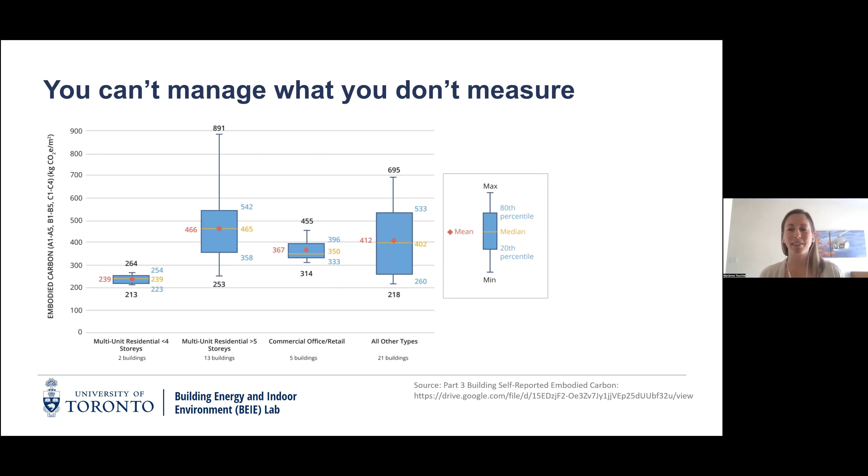So this is sort of a 'keep your eye on this space' moving forward. It's certainly going to be part of a lot more conversations in the future.

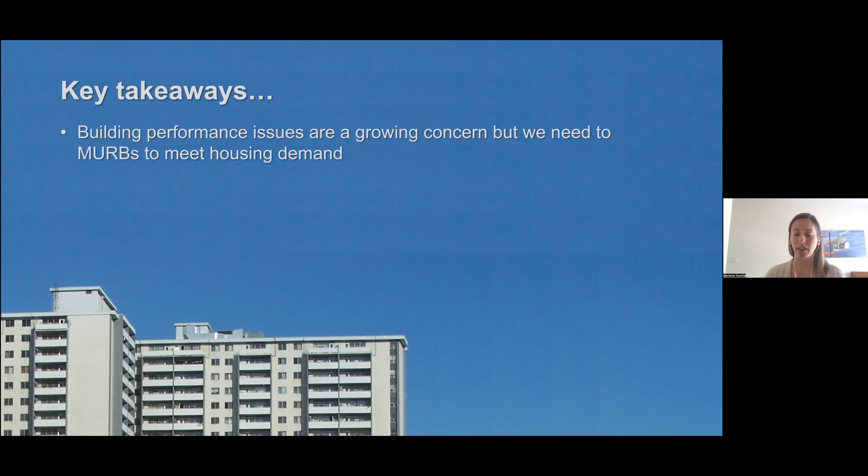So just to zoom out completely, a couple of things I want to leave you with today. Building performance issues are a growing concern, but we need these MURBs to meet our housing demand. We need to address the occupant experience while significantly reducing GHG emissions in this sector, keeping in mind that with our changing climate we have to ensure they're safe, comfortable, and healthy for residents. It's really this trifecta of opportunity and a series of challenges we need to address holistically.

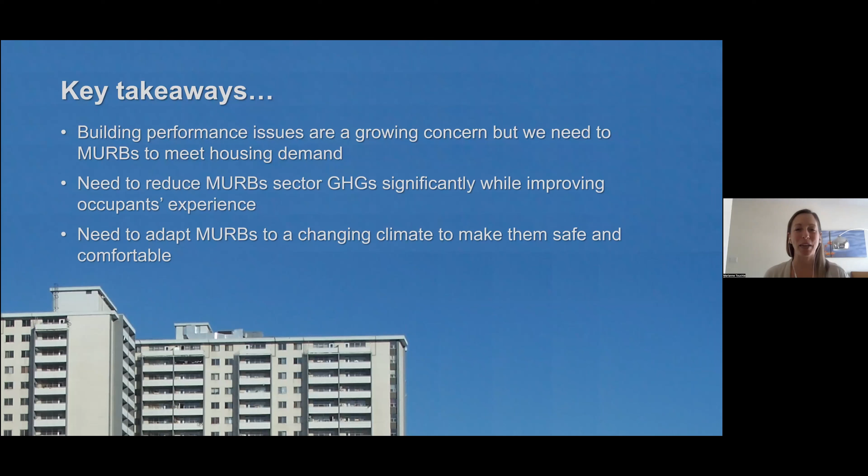I'd advocate for addressing how interrelated these systems are. Think about air movement first, getting ventilation and uncontrolled air leakage under control. Then we can talk about the enclosure and in-suite controls, remembering that those need to happen together. Otherwise, occupants will unintentionally override some of the energy benefits you might see from an enclosure retrofit.

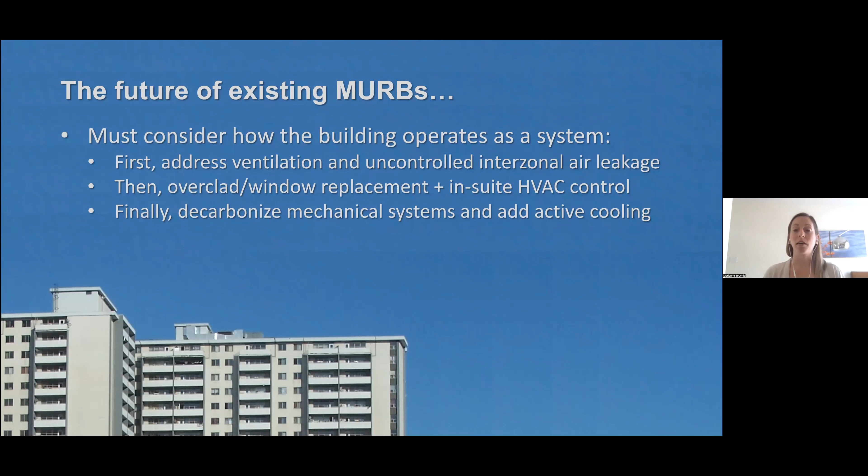We also want to make sure we're decarbonizing our mechanical systems and adding active cooling to deal with the extreme heat events we're going to see coming forward.

While we're focused on GHG emissions and energy performance, we set goals for these things when building new buildings and retrofitting buildings. Integrate comfort goals and goals related to indoor environmental quality as well, because if you haven't got a goal, it won't be part of the discussion as you move forward with design and retrofits for these buildings. We also want to get the most bang for our buck.

So look for retrofits, like interzonal air tightness, that address multiple performance issues. And remember we need to consider life cycle carbon. If you're interested, I have colleagues working on this, and we've got some tools that might be useful for you.

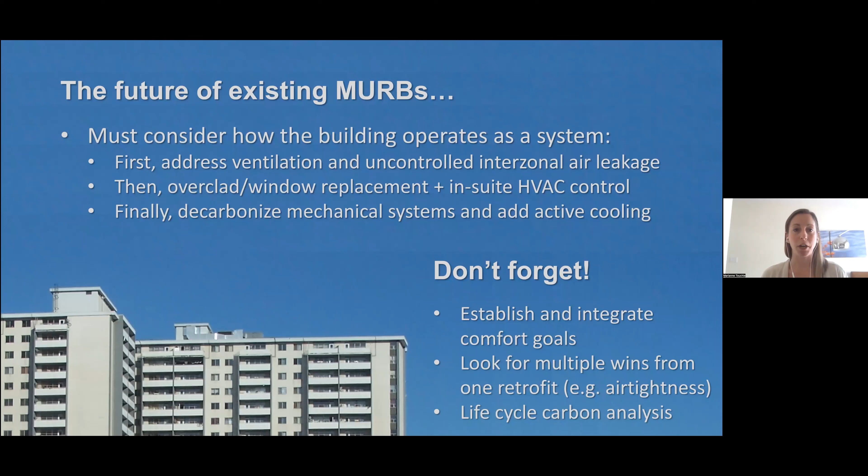So just to make you feel like you're back in class, I've got some homework for you, should you wish—a couple of resources. If this discussion interests you, there are actually four resources here. The first is from the University of Waterloo, an interesting read about what we as Canadians will be facing in the future. The second are two design guides, one focused on thermal resilience and one more broadly on MURB design. I strongly encourage you to review these if this is your workspace.

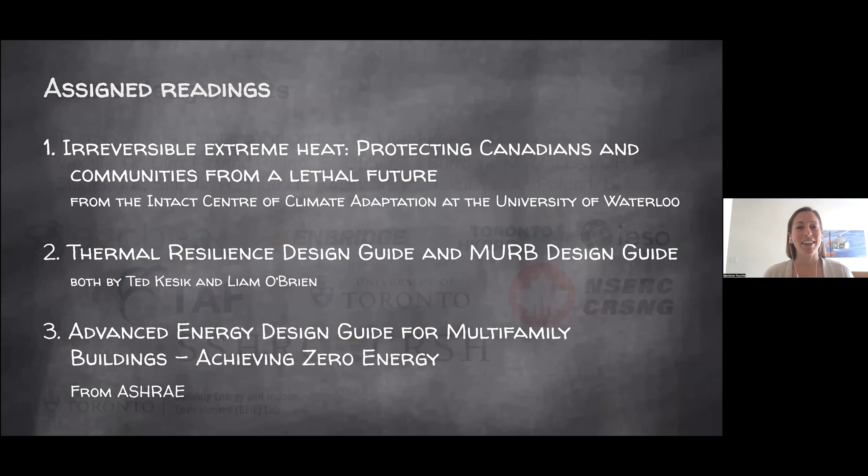The third is also hot off the presses—ASHRAE just released an energy design guide specifically for multifamily buildings in the last few weeks. So some reading for you there. As a last comment, I want to acknowledge all the students and colleagues who've contributed to this work. This represents many, many projects over many, many years. So thank you.